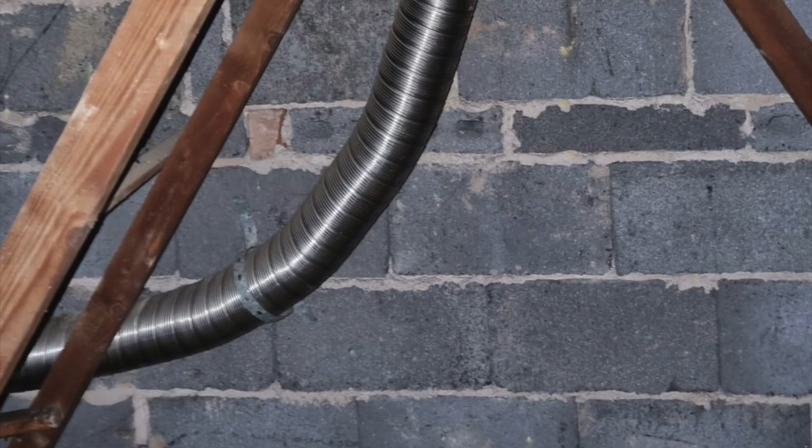This one's a picture quiz, so let's get on with it. Picture number 1. This is what you find in the loft when you're servicing an inset live fuel effect gas fire. So, would you class it as not to current standards? Would you class it as at risk? Would you class it as ID? Or is it ID and RIDDOR?

So this would be classed as at risk, and it's covered in IGEM G11 5.9, existing open chimney flue system installation with one or more defects likely to affect the safe and effective performance of the chimney flue system. And it does say, if you look down there, incorrect use of a chimney flue material, e.g. exposed chimney flue liner, is at risk.

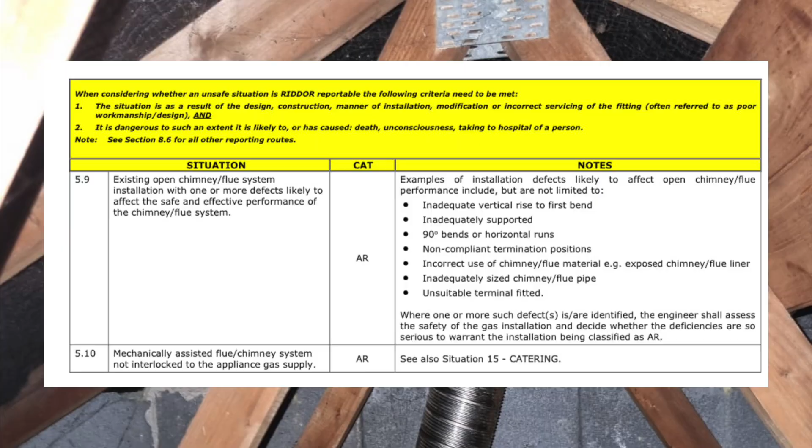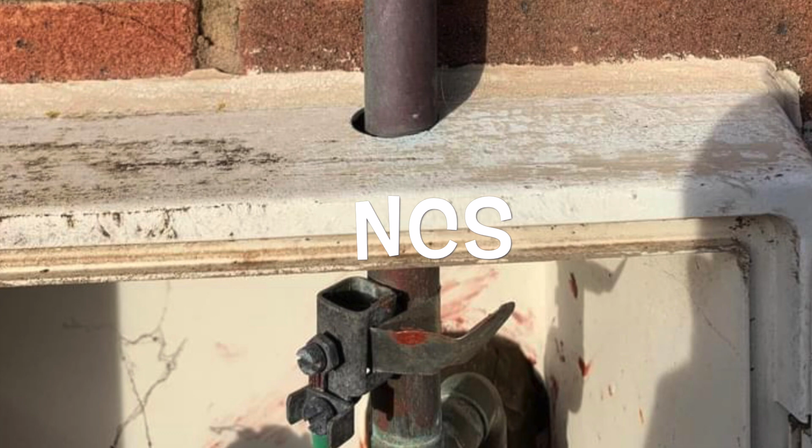Picture number 2. So you're carrying out a tightness test where the meter is in a meter box outside and you find the gas pipe coming out this way. So is it not to current standards? Is it at risk? Is it ID? Or is it ID and RIDDOR?

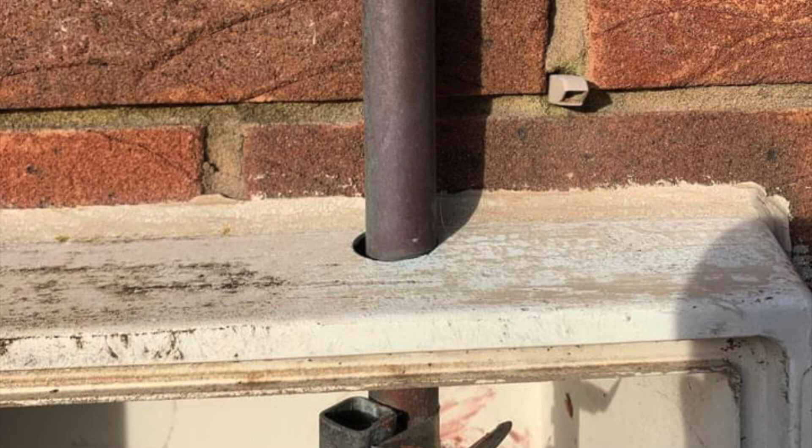Now this pipe sticking through the top of the meter box is actually classed as at risk. Now you're only supposed to bring a pipe out of a meter box from actually out of the bottom of the meter box where the knockouts are. Now IGEM G11 2.8 is probably the closest we've got for this.

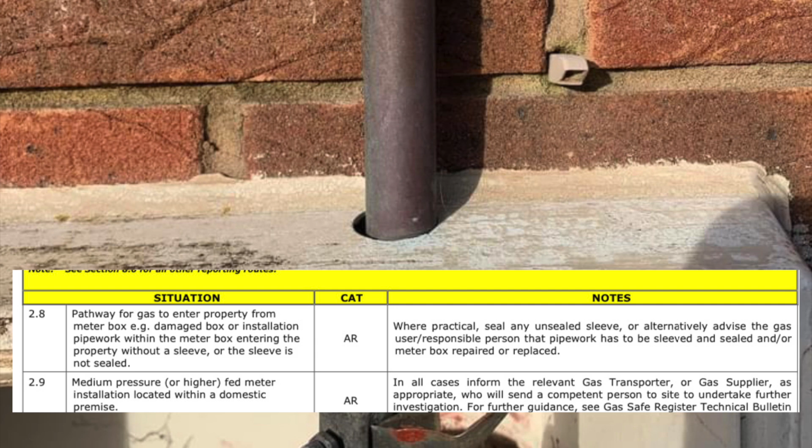So pathway for gas to enter the property from the meter box, e.g. damaged box or installation pipework within the meter box, entering the property without a sleeve, or the sleeve is not sealed, and that is at risk. That's about the closest we're going to get for this, but it's at risk.

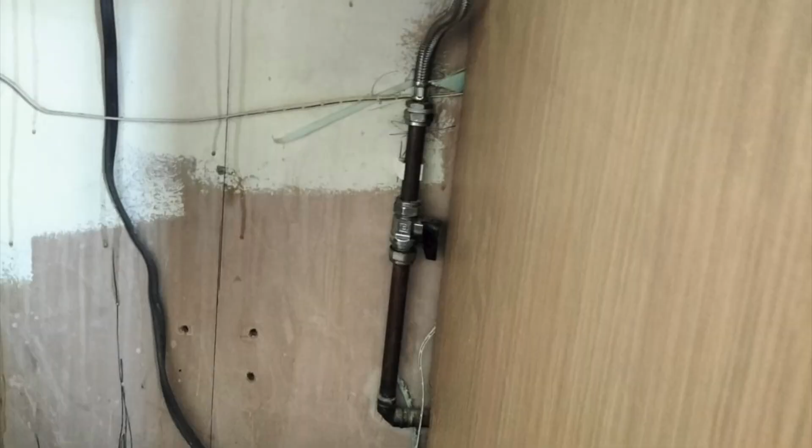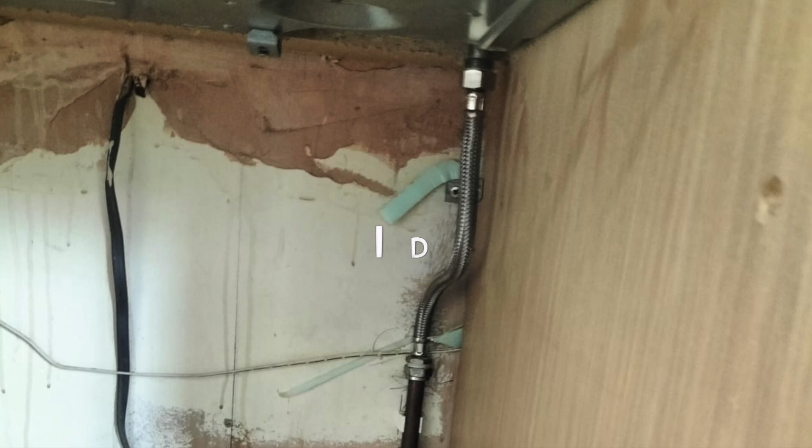Picture number 4. Now, when carrying out a landlord's report, you remove the oven from underneath the hob, and this is how you find the gas pipe piped to the hob. So is it not to current standards? Is it at risk? Is it ID? Or is it even ID and RIDDOR?

Now in this situation, this will be classed as ID and RIDDOR, and if we look at the unsafe situations procedure IGEM G11 3.2, pipework and/or fittings inappropriate material for purpose, e.g. plastic water pipe or hose pipe, would be deemed ID. But again, because somebody's actually done this, it would be ID and RIDDOR reportable.

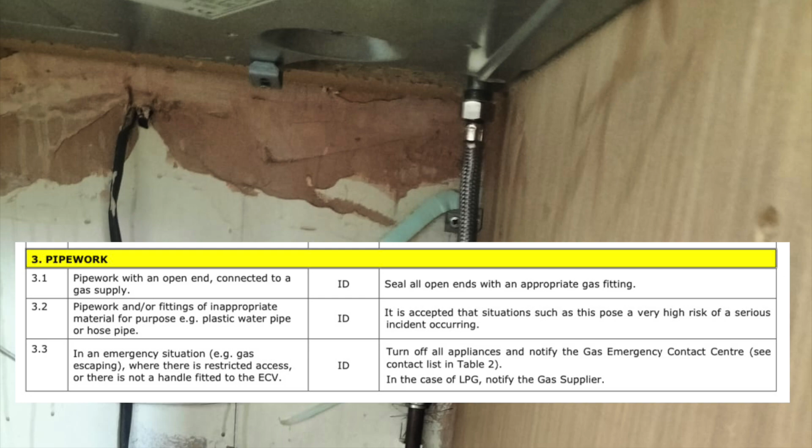Number 5 is a little video. So, you've just installed a boiler. Now under Appendix 5 of the Gas Safety Installation and Use Regulations, you need to visually inspect appliances you've encountered, and this is what you've encountered. So, is it not to current standards? Is it at risk? Is it ID? And is it ID and RIDDOR?

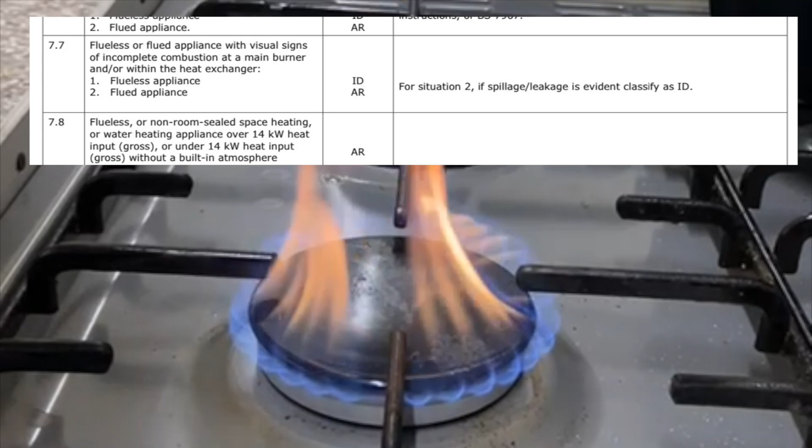Now picture number 6. Let's try this one. So on a landlord's report, you find a cooker is installed with a cooker hose like this. It passed the tightness test and there's no signs of damage on the cooker hose. So, is it not to current standards? Is it at risk? Is it ID? Or is it ID and RIDDOR?

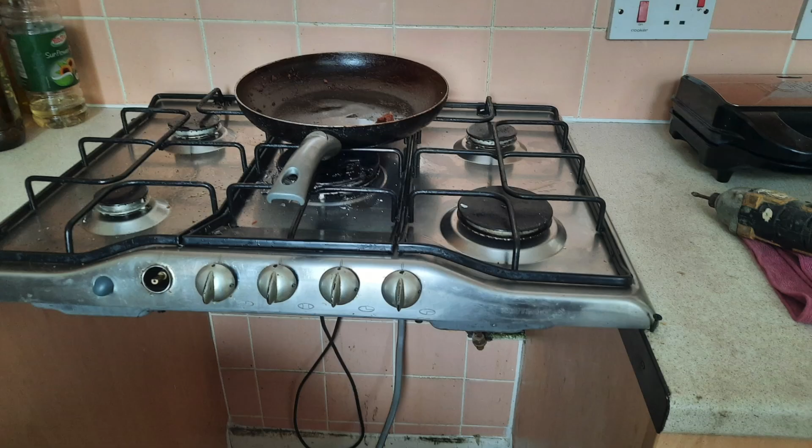Now in this situation, this cooker hose would be classed as not to current standards because there's no damage or risk to life or property. Now let's try question number 7. Again, you go to service the boiler, and this is what you find in the kitchen while you're servicing the boiler. So, is this hob not to current standards? Is it at risk? Is it ID? Or is it even ID and RIDDOR?

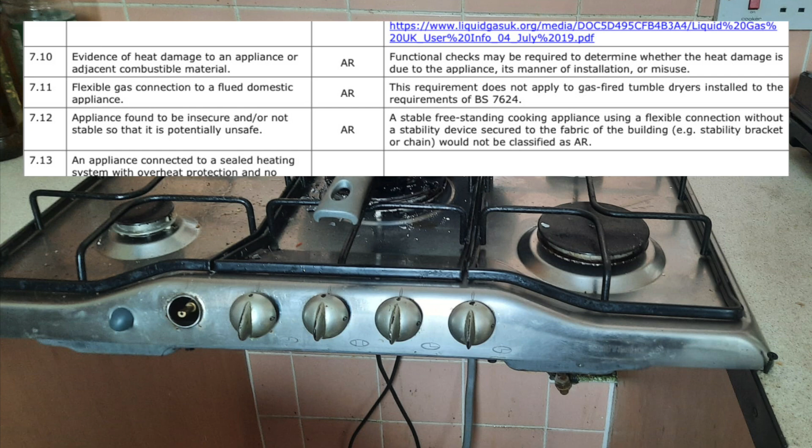That is the question. Now on this one, the obvious one is the unstable gas appliance, which is actually classed as at risk. So under IGEM G11, that's 7.12, appliance found to be insecure and/or not stable. So that is potentially unsafe, that is at risk. But did you notice there's a gas tap missing? So this could potentially make it ID.

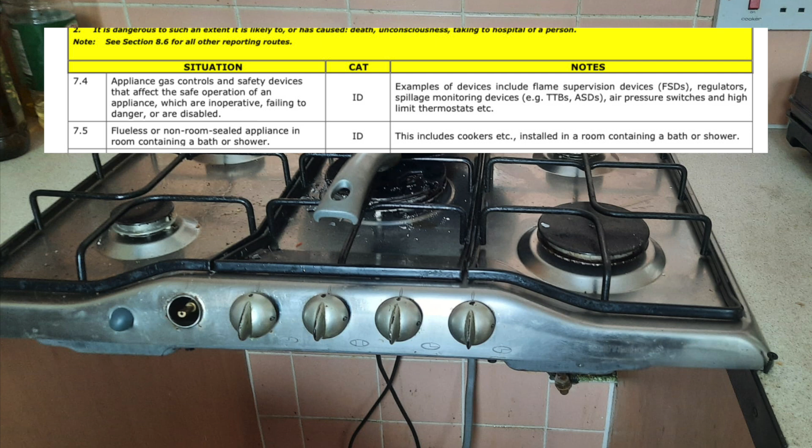So in the unsafe situations procedure, IGEM G11 7.4, appliance gas controls and safety devices that are affecting the safe operation of the appliance, which are inoperative, failing to danger, or are disabled. So I don't think anybody would have a go at you if you ID'd this hob. But hang on a minute, what about ID and RIDDOR? Because somebody has actually installed this in a dodgy location, knowing that it's unsafe, knowing that the gas tap is not working, and it's in a pretty poor state. So, it's ID and RIDDOR.

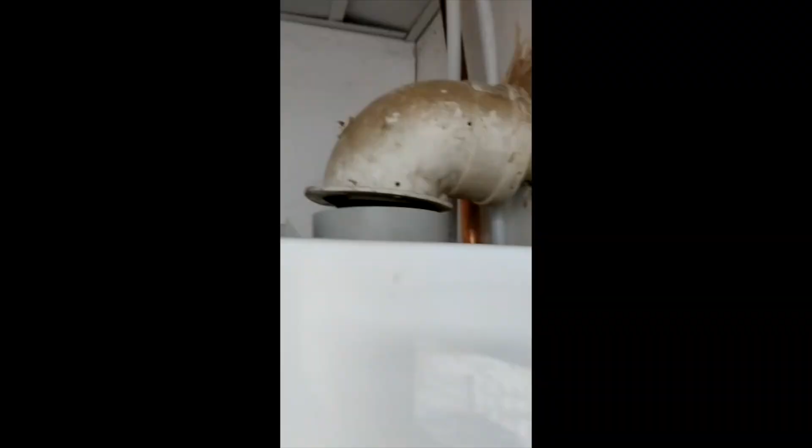Let's try number 8. So you go to this boiler to service it, because it's a year old, and this is the flue you find. So, would you class this flue as not to current standards? Would you class the flue as at risk? Would you class the flue as ID? Or would you class this flue as ID and RIDDOR?

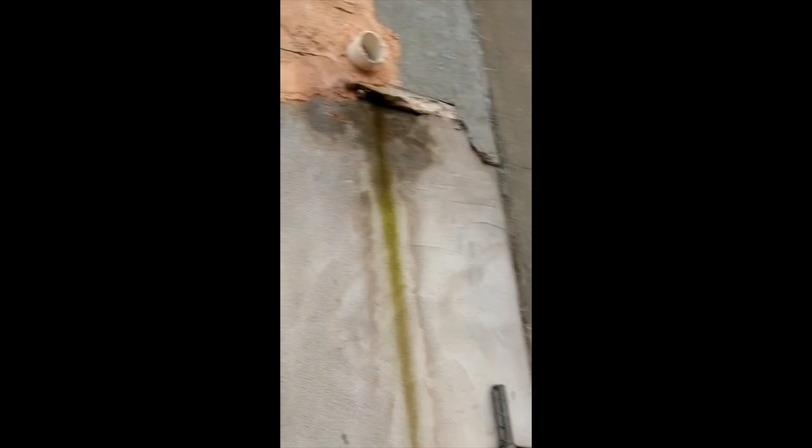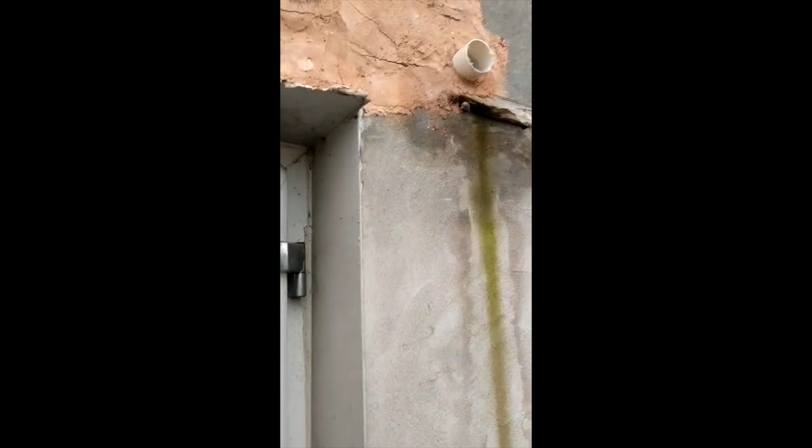Now hopefully you said ID and RIDDOR because this flue is wrong on so many levels. Just amazing. Question 9 and another flue. So this is a Worcester flue sticking out the wall. When testing, no products of combustion were entering the building at all.

What are you going to classify this as? Is it not to current standards? Is it at risk? Is it ID? Or is it ID and RIDDOR? Now, because there's no products of combustion entering the property, this situation will be classed as at risk. For further information on the correct sealing of flues, you can look at Gas Safe's Technical Bulletin 152.

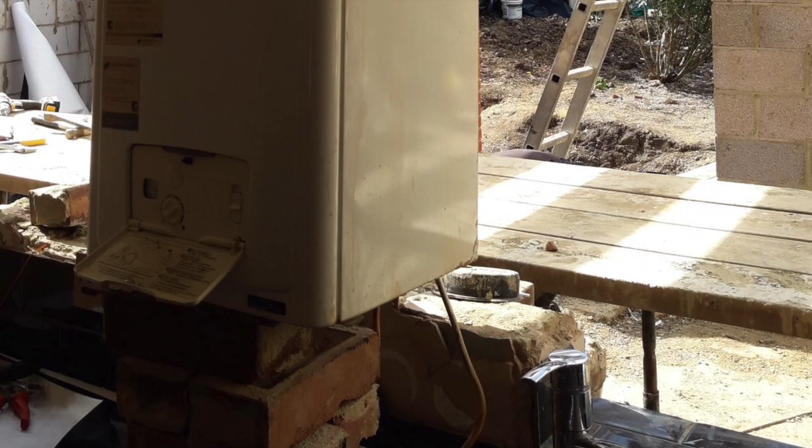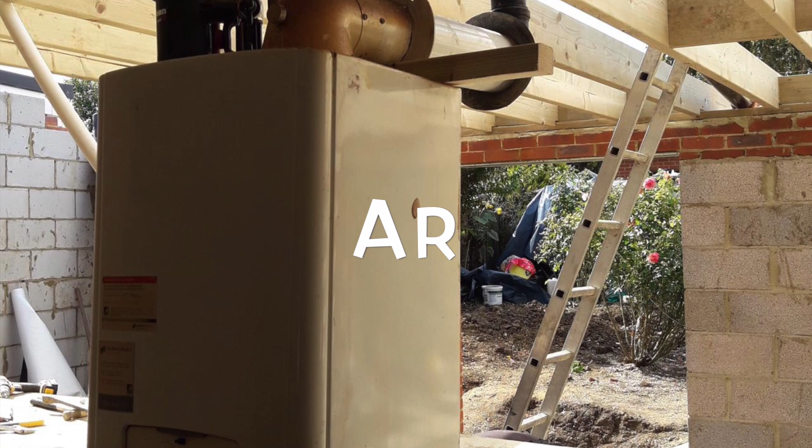Now, picture number 10. So you've been asked by a builder to remove this boiler and install a new one, but not until the walls have been built and the roof has been put on the extension. So, how are you going to classify this boiler as you find it? Is it not to current standards? Is it at risk? Are you going to ID it? Or are you brave enough to ID and RIDDOR the builder?

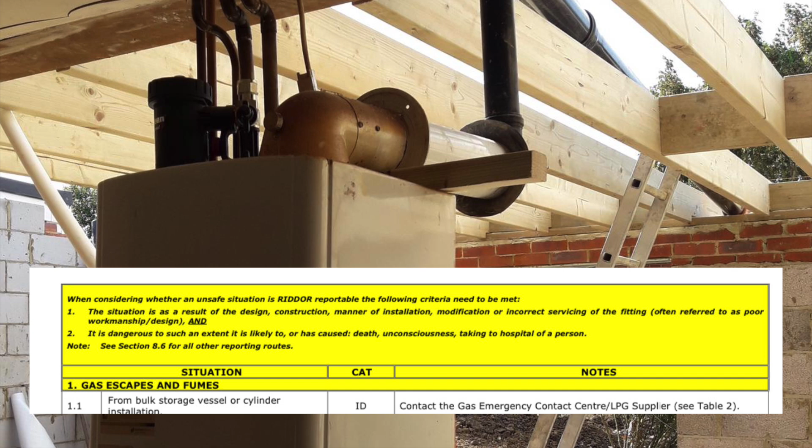Now I couldn't argue with you if you said this boiler is ID and RIDDOR. If you actually read the yellow section at the top of every page of IGEM G11, it says, when considering whether an unsafe situation is RIDDOR reportable, the following criteria need to be met. Number 1. The situation is a result of design, construction, manner of installation, modification, or incorrect servicing of a fitting, often referred to as poor workmanship design, and is dangerous to such an extent it is likely to or has caused death, unconsciousness, or taking to hospital of a person. I think this probably covers all that. So I definitely would be ID and RIDDOR in this situation.

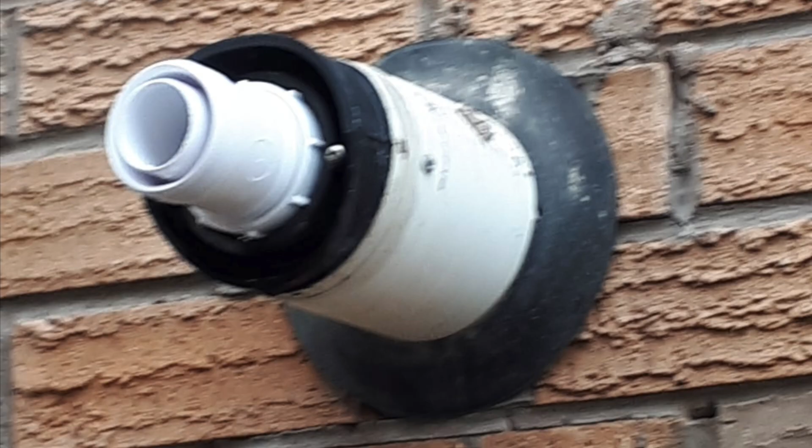Now try number 11. Again, this is a Worcester flue. So, how are you classifying this? Not to current standards, at risk, ID, or ID and RIDDOR. It's up to you.

Now the closest we've got in IGEM G11 is at risk, 6.6 room sealed chimney flue systems which are damaged, insecure, inadequately supported and/or using incorrect jointing methods to such an extent that it may cause it to become unsafe and/or a breach of integrity is likely. So sticking a waste fitting on the end to make a terminal probably comes under that one, I think.

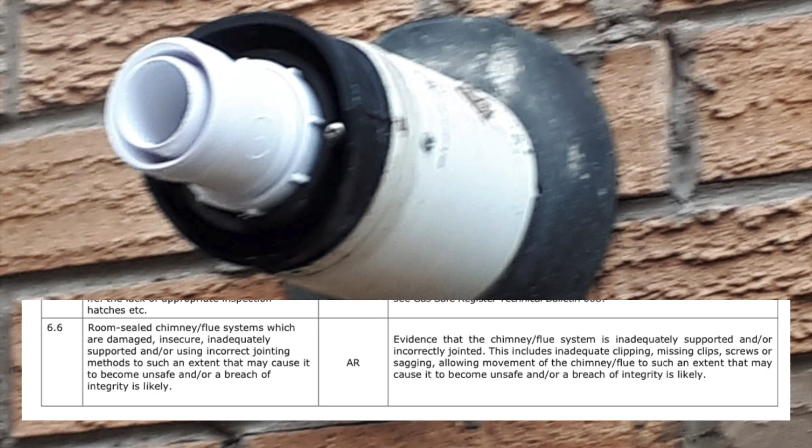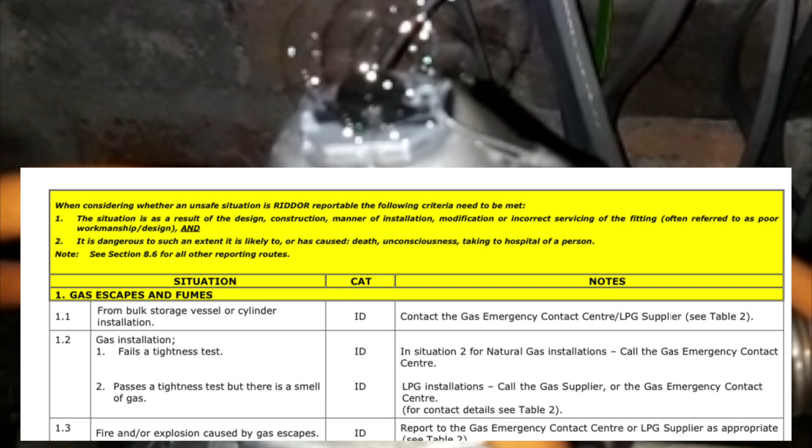What about number 12? After carrying out a tightness test, you find the regulator is leaking on the top. So is it not to current standards? Is it at risk? Is it ID? Or is it ID and RIDDOR? Well, because it's failed a tightness test, it makes it ID. 1.2 in IGEM G11, failing a tightness test, is ID.

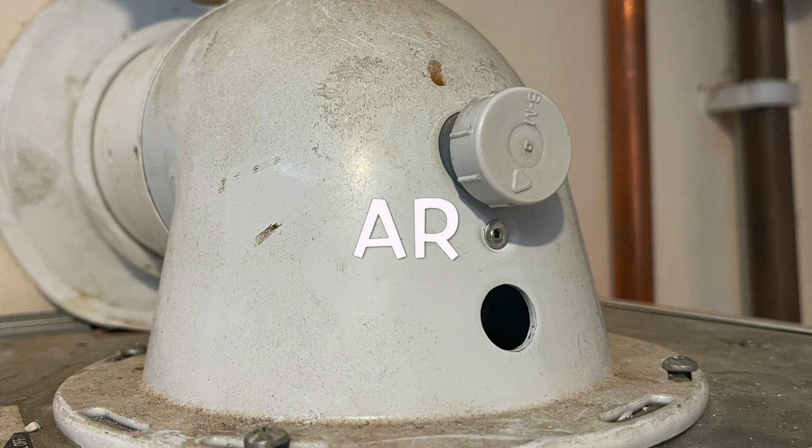Now let's try number 13. You go to service this boiler and you find the flue integrity test point cap is missing. So is it not to current standards? Is it at risk? Is it ID? Or is it ID and RIDDOR?

So this is actually at risk and it's covered in IGEM G11 7.2. Number 2, air inlet sample point cap missing, damaged, no evidence of leakage of products of combustion. That would be classed as at risk. Obviously, if you did have more than 10 parts per million of CO coming into the room, that would be deemed immediately dangerous. And if this cap was missing on the flue gas products test point, then that would be automatically ID, whether you've got 10 parts per million of CO or you haven't.

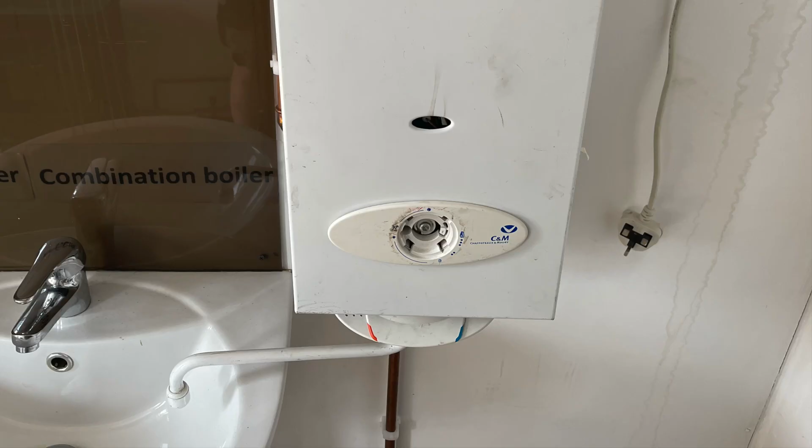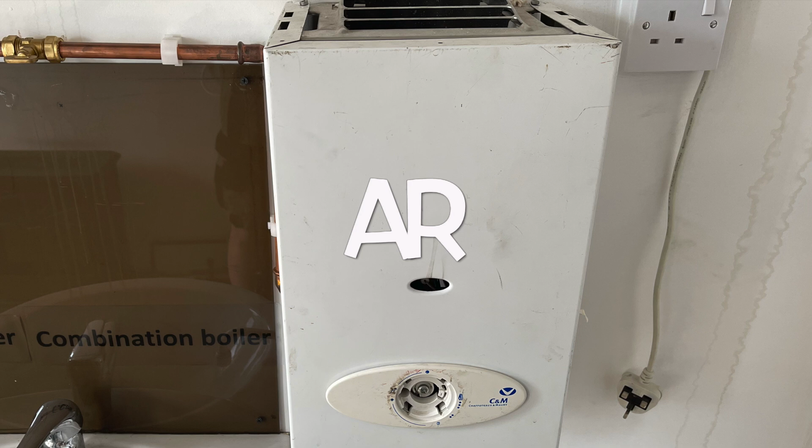And finally, picture number 14, because you can't end on 13, can you? So this flueless water heater is actually installed correctly. So, are you going to class it as not to current standards? At risk? ID? Or are you going to ID and RIDDOR it?

So a sneaky one to finish with. And did you notice this flueless water heater hasn't got the 5-minute warning label? So that would be classed as at risk. IGEM G11 8.4, flueless water heating appliance without 5-minute warning label for usage and time is classed as at risk.